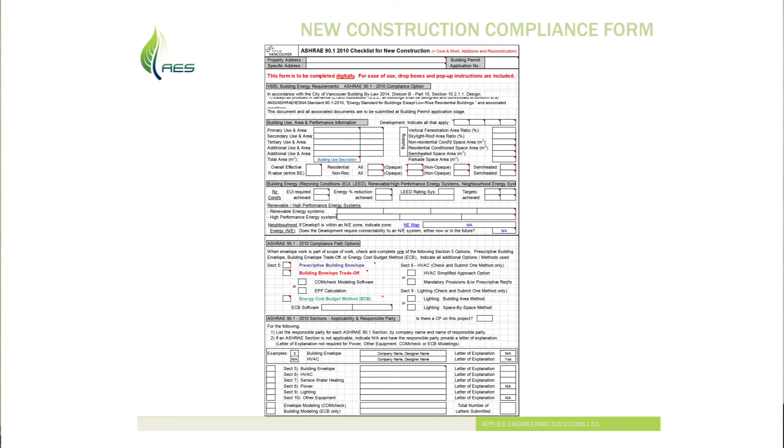If you're going for rezoning, submit your 6 points under LEED Gold or better than the baseline under LEED and ASHRAE, and you're meeting a minimum LEED Gold performance. That's also now changed in the City of Vancouver. Instead of the 6-point baseline, they're now doing 22% better than baseline. It's exactly the same, but they're quantifying it in percentages rather than just saying number of points in the LEED system. Then the ASHRAE 90.1 compliance path, prescriptive, or you're doing an energy model.

What are you submitting in here? Which professional is it? And the letter of explanation, etc. So this is the cover sheet. I fill it. Goes to mechanical, goes to structural, goes to envelope, goes to the architect. Architect is usually the prime consultant, and they take it from there and go forward.

That's one of anywhere between 25 and 50 pages for documentation on that 100,000 square foot facility. On a TI, it can be simpler, could be possibly 5 to 10 pages, but on anything brand new or anything of a decent size scale, it's a lot of documentation, which brings me to my next point, which we'll talk about shortly. Building permit stage, right here.

So in addition to the form that we submitted earlier, there's one for a building permit stage. We fill in all of the requirements. Under lighting, energy statement on drawings. If this is not checked off, plan checker won't take your drawings in. Next line item, lighting compliance documentation. You can click it, download an Excel spreadsheet, fill in all the information.

It's identical to the requirements for ASHRAE if you're doing a LEED project. It's also very similar to the requirements for BC Hydro if you're going for a Power Smart rebate program. So once you fill in one form, you can transfer all the information back and forth. And then down here, this is what's new. If you could see the occupancy stage. So occupancy stage, and right there.

First box, building permit stage submission is complete and accurate, no revisions required. Anybody filled one of those yet? Exactly. We have 3 under our belt. That is the way we want to be going, because if you don't submit that one, the next line item that we're looking at, submitting revised deliverables.

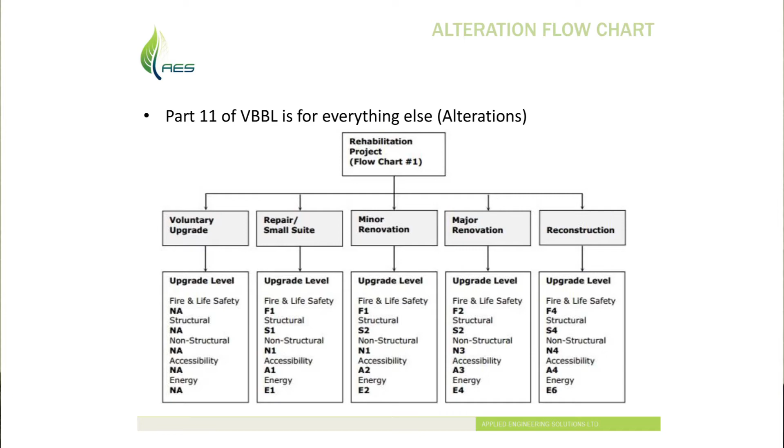Reconstruction, gut to the stud. You're going to gut all the way to the core of the building, and you're going to reconstruct everything. Brand new glazing, brand new electrical, mechanical, etc. That's reconstruction. The energy requirement under that one is E6, which is basically all of ASHRAE. E7 is the next level up, but another way to look at it, rather than bore everybody with the codes, is all of ASHRAE. Under minor TI, it's E2.

E2 gives you a shopping list of 16 items you can pick to do. So under alterations, you have to do alteration requirements under ASHRAE, and we'll talk about that in 3 slides from now. You have to provide compliance with lighting power density. You have to provide automatic lighting controls. But in addition to that, you pick 2 items out of the 16 in the shopping list.

Examples of them: make sure your exit signs are LED. Make sure your HVAC is balanced. Make sure your hot water piping has insulation. Very, very simple. We're going to do that on every project anyway. So in my opinion, what the city has done here has made it very simple and cost-effective for some of the TIs. They may not incur the cost that a 200,000 square foot TI would. So it's very easy to understand. The forms are very prescriptive.

Here's an example of the form. You can't see it, unfortunately, but right up here, you can prescribe the type of alteration you have, and it'll tell you automatically, you're E2 or E4. It'll tell you how many shopping menu items you have. Based on that, you pick the shopping menu items that you want, and you indicate them right in here, indicate the drawings that they're on, fill in all the boxes, make sure you have a reflected ceiling plan.

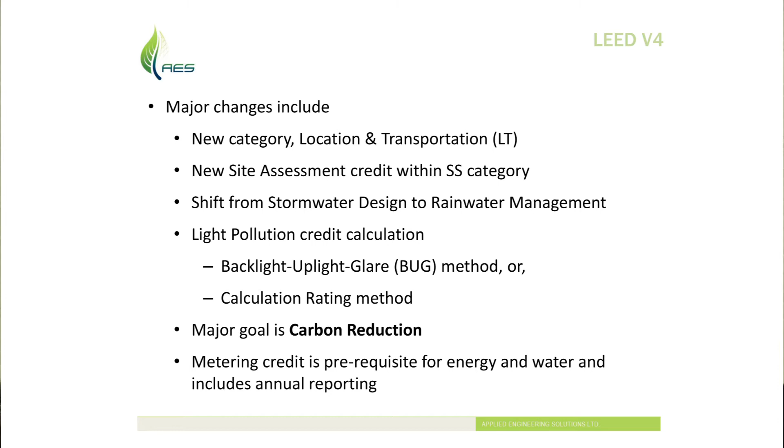The other major change, and I won't talk about LEED too much because we're here to talk about ASHRAE, there is a whole bunch of different sectors or rating systems you can work with. Before, it used to be new construction, commercial interiors, renovations or existing buildings, or MURB for multi-unit residential building. Now, with the exception of a pool, an aquatic, or a community center, I have a rating system for everything. So if I'm doing a tilt-up in Langley, I've got a rating system. I'm doing a district system, I've got a rating system.

I'm doing a research facility, I'm doing a data center. Talk about energy hogs, worse than pools, data centers. So data center, I've got a rating system for that. So it actually helps you achieve some of the goals around LEED. And we'll see when the rating systems come out and how we can apply and comply with it. I'm not going to talk about the rating system in detail other than the focus of LEED has changed. Previously, it used to be energy reduction. The new approach is carbon reduction.

So if you don't understand the difference between the two, when I save energy, I save some carbon because I'm saving electricity or gas. And they both have carbon signatures in British Columbia. Electricity are much lower, which is why the fuel switching has been happening for the last 4 years since carbon tax was introduced. Carbon reduction, when I save carbon, I automatically save energy because carbon reduction is approaching everything differently.

That's why all the automobile manufacturers are coming out with electric cars and A series and C series and 1 series and all these smaller versions of cars because they all have to reduce their carbon emissions by 50% by 2016. So all the manufacturers have it way worse than what we have. And all we're talking about is turning off some lights. And the amount of grief we get from the community for doing that is incredible because nobody wants to turn anything off. It's got to work.

Metering, the last one, it's a prerequisite in the new rating system. In the city of Vancouver, metering is also now a building code requirement. You have to have separate meters for all your different systems. They've left it open to interpretation. So you can have 1 meter and apply and they'll reject it. So you really have to break it down and use your own logic.

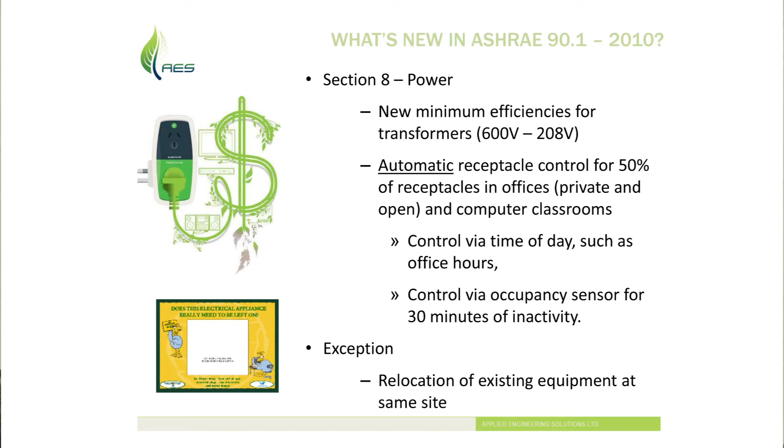But if you've left your desk and you're not there for the majority of the day, or even more than 30 minutes, nothing needs to run. And that's the intent of this code. You can do it by time of day. So time of day is also acceptable, and I used to say we do that for anybody that's got banker's hours. Since the recession in 2008, I think we all work consultant hours, so every waking minute we're working, 24 hours a day, so time of day doesn't really work. We provide local sensors and turn lights or turn receptacles off as required.

Lighting and alteration. So previously under ASHRAE 90.1-2007, the threshold was 50%, which meant almost no project. It was previously 50%. Now it's 10%. So the example I'll use, if you take a 100,000 square foot building, take a typical floor, 10,000 square feet that you work with. On 10,000 square feet, if you have 10,000 watts of lighting and you're altering more than 1,000 of it, you have to comply with this.

So if I'm doing a TI and I've got a floor and I've got a boardroom, and the boardroom is 1,000 square feet of the 10,000, and the boardroom is 10% of the lighting that's connected, and I'm taking that boardroom, chopping it up, and making it 3 or 4 private offices, I have to implement LPD, which is make sure you don't exceed the lighting power density within that space, and I have to implement automatic lighting control for the space I'm renovating, not the entire floor. So the 10% area I'm modifying is where I have to comply with it.

And the definition of space is your floor, the area, the walls. You can define it any which way you want, but grossly stating an entire building is my space and I'm doing one little cubicle in the corner, so that's under 10% and I comply, that doesn't work. There has to be logic behind it. So your space is typically the area that you're in, and we typically limit it to 1 floor, so 10%. If I'm below that, I don't have to implement it. If I exceed that or am at the threshold, I have to implement 2 things.

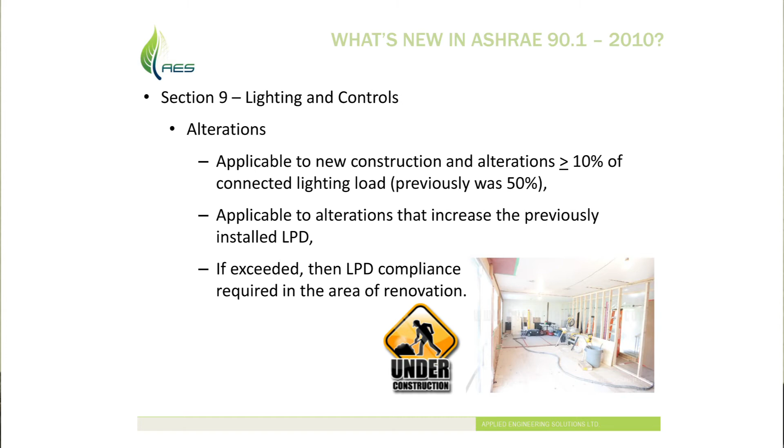One is LPD, which is lighting power density. So if the code says for a boardroom I'm only allowed 500 watts and I've got 1,000 in there, I've got to reduce it to 500. So the finishes and the reflectivity of furniture and all the finishes in the room are very important to us, because the lighter they are, the less light I can put in, and the brighter the space feels. There are exceptions, and in the interest of time, we're just going to kind of rush through this.

Lighting controls. Any enclosed space requires some sort of control. So automatic shutoff is required just about everywhere. If I'm in this boardroom and I leave this boardroom and everybody else exits, 30 minutes after everybody leaves, lights must turn off. That is code. 30 minutes is the maximum the code allows. You can design it for whatever you want. In our office, for the receptacle switching, and we designed our office in 2012 when receptacle switching devices were not even available.

So in 2013, when we finally moved in, we bought power bars, hardwired everything in, and we've got sensors under everybody's desk. So 5 minutes of no motion, everything except the PC turns off. You come back to your desk, boop, boop, everything's running. The cost for it, $50 a workstation.

And it might seem like a lot, but on the energy bill I save about $200 to $300 a month on the other side, because other than heaters and fridges, because no one's allowed, that's just a rule in our office, everything else is off. Task lights are off and everything else is off. So you do save on the bottom line.

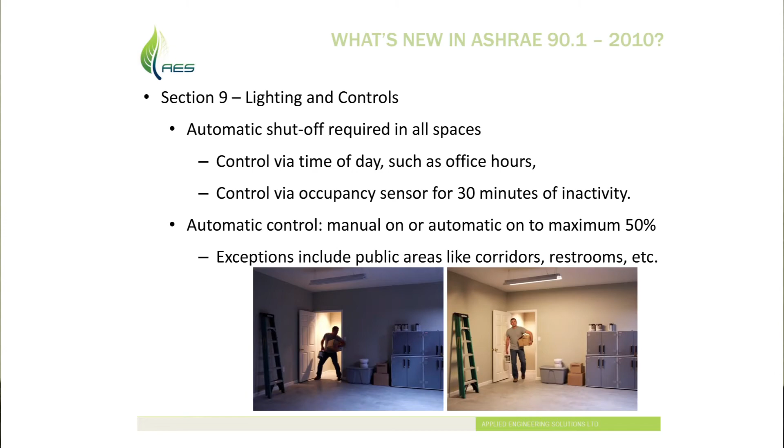Control via time of day: you can do a central bank and a time clock and turn everything on and off. That is a compliance method. We don't design to that. We actually design for local activity. So anything that's enclosed, I've got a local sensor. If it's an enclosed room, I'll do a local sensor. If it's common area corridor, I'll put in a low voltage system.

But typically we go with line voltage, localized control: cheaper, easy to repair, ton of product on the market. We do a 120 volt system. We don't do 347 anymore because 347 control is very expensive and very difficult to procure. There are exceptions like corridors and so on. They talk about stairwells as an exception, but it's not, and I'll explain why in a few slides.

Automatic on. So anybody work in an office tower downtown where you walk into work at whatever time and the entire floor is lit? There are a few people, not very many. Good, your landlord's already gone in and implemented something. But what used to happen, in the older designs, is you had a bank of switches as you got off the elevator. You came in at 6 o'clock, all the lights swept on, and at 8 o'clock they started sweeping off. You get the flicker control to give you a warning. You went back and hit the switch to override and the lights came on.

We can't do that anymore in design. It's not allowed. BMS control to turn everything on is no longer acceptable by code. Not the engineer being a tree hugger. It's a code requirement. Manual is what we have to do. So automatic control, if you are going to tie it into some sort of automation to turn the lights on,

50%. The logic behind that is if I come into an office on a Saturday afternoon because I've got to do something, I don't need the whole floor on. I need enough lights to get me to where I need to go. 30 minutes later, all turns off, and where I am is the only thing that stays on. So if you are going to design with automatic control, you cannot turn everything automatically on. You have a 50% maximum requirement. Anything beyond 50% is manual on, so a switch at reception that turns the lights on.

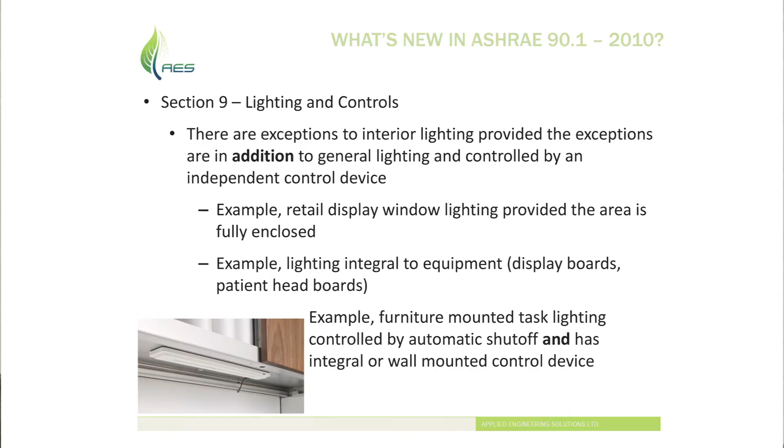The last one is task lights. So the design in BC, and everybody probably remembers this term, 50 foot-candles. And 50 foot-candles was the number. It used to be 100, and it went down to 50, and WorkSafe BC worked with that number. Every office space had to have 50 foot-candles of lighting level. So we put in all these deep cell parabolic with 2 or 3 lamp requirements with T8s or T12s, and we hit 50 foot-candles. And then ASHRAE came in and the LEED movement came in, and we wanted to save energy.

So we went from 50 down to 30 so I can reduce the illumination level so I save energy, so I can get more points on the LEED system. And I gave everybody a task light. And the task light provided lighting where I need it, and the general illumination was bright enough so I can work in my space. Now, if a task light is free-standing, if it's just sitting on a desk, I have to include the wattage for that in the lighting that's built into the ceiling. So I might as well have done 50 foot-candles and call it a day, but then I don't save energy.

So task lights now, to exclude them, they must be hardwired. So clamp down to a desk, yes, that's a solution for anybody that cannot procure pre-wired workstations with built-in task lights. But task lights that are built into a workstation, manual on switch, and automatic off sensor. If you have that, I can exclude the task lights.

So for the designers and the furniture suppliers in the room, the FF&E discussion happens way after we start construction. I've issued IFT, I've issued IFC, everybody's already started ordering and building raw construction, and then we go and procure furniture. Furniture, I need to know at the beginning of the project what you're going to do with furniture. Is it pre-wired? Is it not? Simple decisions, not Haworth or what manufacturer. Pre-wired or not, you're going to get task lights in or not, what's your reflectivity on the furniture? So those decisions need to be done up front.

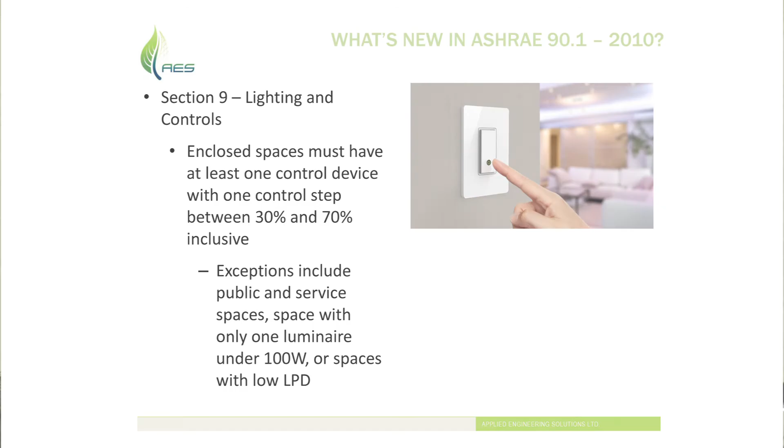Where the 30 and 70 comes from, remember, ASHRAE is an American standard, not a Canadian standard. So a lot of the American designs are still working with 3-lamp solutions. So if I turn one of the 3 lamps off, I'm at 70% of maximum. That's where it comes from. So when you understand the intent, it's easy to figure out why. What we do in design is we just put a dimmer in the room and we comply with it.

You have exclusions. If there's only one fixture in the room, less than 100 watts, I can exclude it. But typically, it's not the case. You have much more than that. Occupancy sensors are required just about everywhere. So if I leave the room, I need an occupancy sensor. In our designs, we use vacancy sensors. We don't work very much with occupancy sensors unless I'm in a bathroom.

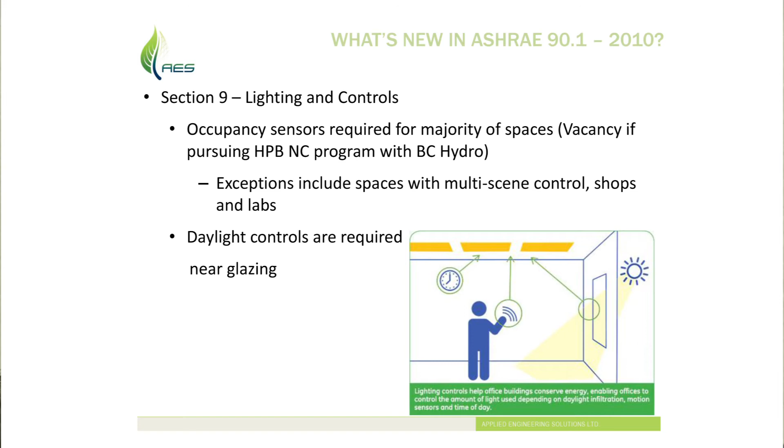Main reason being, almost every project I pursue a PowerSmart hydro rebate or a credit back from BC Hydro. And Hydro will work with anything that you do above and beyond baseline. So if baseline says you must put an occupancy sensor in, you're not going to get a credit for that. Vacancy sensor is a credit. So the difference between the two, an occupancy sensor is automatic on, automatic off. Vacancy sensor is manual on, automatic off.

I've got a corner office facing Granville. It's always lit between 8 a.m. and 5 p.m. My lights are only on when I get in at 5:30 in the morning, and by 8 o'clock I turn them off, or the daylight sensor kicks in and turns them off. So any other time of the day, if I come in and I need light, I hit a button and manually turn the lights on. So the idea is if your space is well lit, you don't need to turn the lights on. So that's why we use vacancy sensors.

There are exceptions, but basically, if you've got glazing around the perimeter and you've got a workstation around there, you've got to dim the lights, and it's got to be automated. You can't do it manually. Parking garage, the most controversial one out of everything that we've got to do. All parking garages, we've got to turn the lights off. It is a requirement. Read section 9.4.1.3, subsection 1, which says comply with the front end, and the front end says everything must turn off after 30 minutes of no occupancy.

So in our design, what we do is at 20 minutes, we provide a flicker, and the lights give you a flicker. So if you're in there, it stays on, and there's occupancy sensors everywhere. If you're moving in the parkade, it's on. But at 3 in the morning, all the office towers downtown, there's no reason for any of the lights to be running because nobody's in the parkade. By code now, we've got to turn them off.

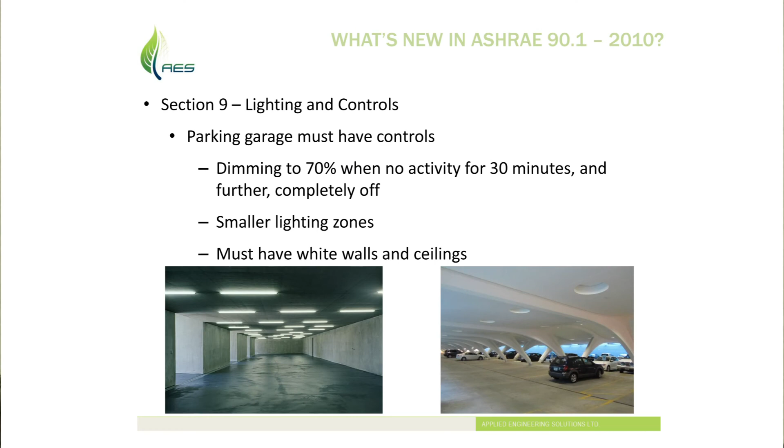And that picture on the right, by the way, is a project in the US Midwest, done for $35,000 a stall. $35,000 per stall. And the budgets we use in the city of Vancouver are $40,000. So it is very doable. It's not something that's far-fetched.

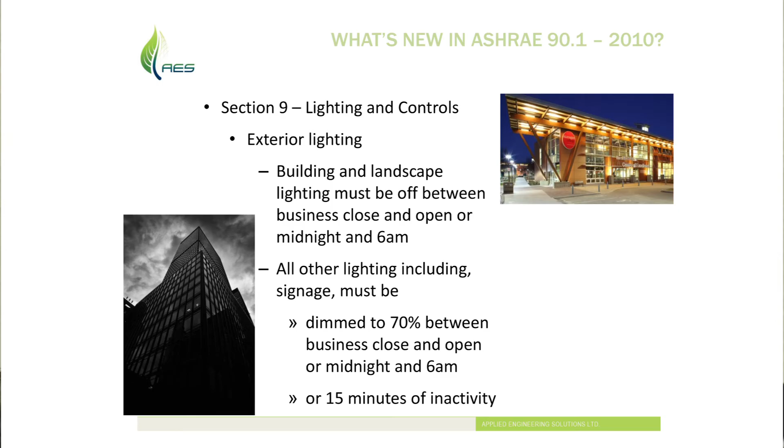The next item is signage. So in signage, we've got to reduce to 70% illumination. So if you've got a building sign on the top of a building or at the front or anywhere around your building, you can have it lit after hours, but it must be dimmed down so that you're not bugging your neighbors and you're not affecting animal wildlife as well. So this is code. This is not us being energy efficient and trying to push the envelope. This is the baseline. We've got to go above and beyond this.

Lighting controls, for anybody that does hotels and guest rooms, you walk into a guest room. So if you go down on holidays, to Mexico or the Caribbean or anywhere in the warmer than here climate most of the year, you leave your room, you pull out your guest card, everything turns off. That's where we're going to end up in 6 years. Right now, I've got a master kill switch. So I walk into a room or an apartment or a hotel room, I've got a master switch that provides the power to all the rest of the lighting in the space, and then I can further turn things on and off.

When I leave the room, I hit the master switch off, kill all the lights in the space. That is code. And all hotel chains are now implementing it because they've saved a ton of money. And the ROI that I've been given on this requirement is about 6 months by every hotel operator in BC, based on our low energy rates. So it is worth doing. Task lights we've talked about.

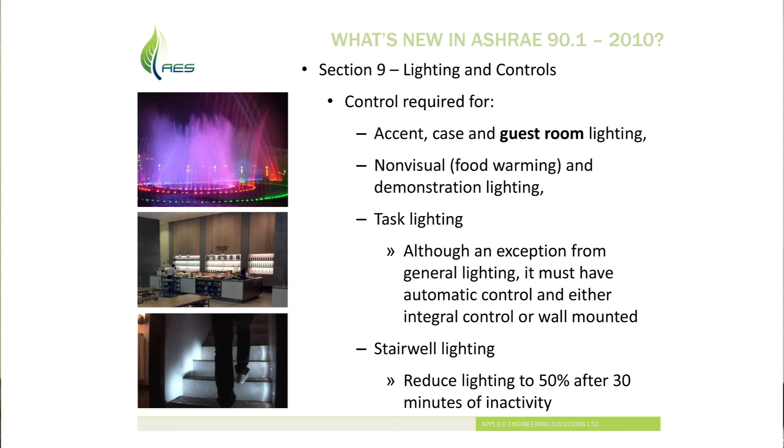Stairwells. So stairwells, we have to reduce the level of illumination in stairwells down to 50%. So all the stairwells in all the office towers in a downtown setting or a suburban setting that nobody ever uses because we're so dependent on the elevator or the internal staircase if you've got a fancier office. You may not use it, which means it's always lit all year round. The only time you go in is when the landlord makes you do a fire drill. Other than that, nobody touches it.

Now we've got to turn the lights down to 50%. In our designs, we go down to 10%. If you walk into a landing, the light comes on, the one above and below the lights come on. So if on this landing the light fails, the ones above and below are lit, get you illuminated so you can exit the building. But dimming for stairwells is code. It's not something we are trying to do to save energy.

Mandatory commissioning, I talked about it at the front end. So if you read the line, it includes functional testing and must be an independent agent. So on a LEED project, we have an independent commissioning agent that does all the commissioning. We include in their specification to do the lighting as well. If you're not pursuing a LEED project, you still have to do this. And it's not me, and it's not Tony doing the lighting supply, and it's not Craig doing the lighting installation. It's somebody that's independent to the project. So you have to get an independent person come on board.

And we're not talking about somebody that's certified in a level of detail that's beyond what we already do. It's lighting installed, yes. Controls, yes. Works, yes. Give me a letter, make sure it's done. That's all we want to do, make sure it's commissioned.

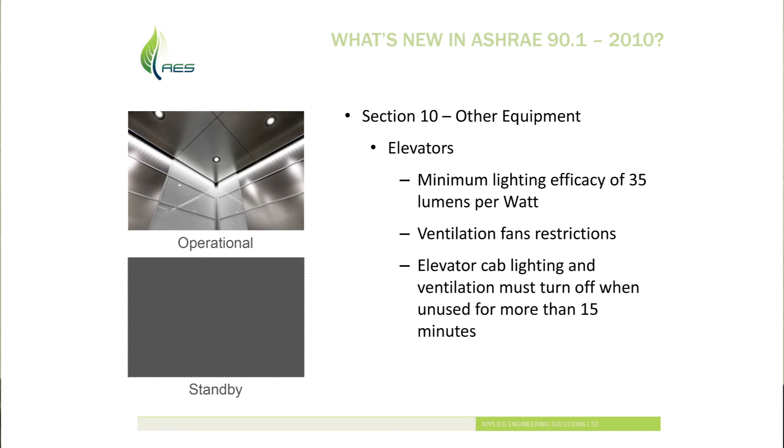The other one for anybody that specifies elevators, and the reason I throw it up is nobody looks at Part 10 of ASHRAE 90.1-2010. Part 10 is for other equipment. Under other equipment is elevators. So now, if you specify an elevator, it must have a shutoff for all the lighting in the elevator and the fans in the elevator if the elevator is in standby for 15 minutes or more.

So why I mention that, you can still buy old product, and if you specify that on a project, and Sally's laughing because we can't specify it on a few projects, the inspector at the end of the job, when he comes in for a final permit, you may be pulling that elevator out. There's one project in Vancouver where that is occurring. I won't name it. Very unfortunate for the owners, but it's code. You have to do it. So don't buy an old product. Make sure you're up to par with what's important.

So, who cares? Why does all of this matter, and why is it a big deal? I'll give you one very, very simple example. We did a project where I worked with the architect. No ceilings, concrete, very light coating on top.

All the finishes were approximately 70% reflective, lighter whites, lighter browns, no grays. Carpet, very, very light gray. We worked with all of that, and the requirement from day one: suspended fixtures, no hot spotting. I don't want to see the strip of light when I'm driving by on the highway, the bang, bang, bang, bang, and I can see the illumination. I want an even graze across the ceiling.

So we picked the right reflectors, we picked the right fixture, and we worked very closely. We did 3 mock-ups, we got it all done. And then at the end of the project, we weren't informed, but somewhere through the process, the designer accepted a change in the carpet from light gray to dark maroon and shaggy style. So the reflectivity of a light gray was 50-55%. The one they accepted was 0.

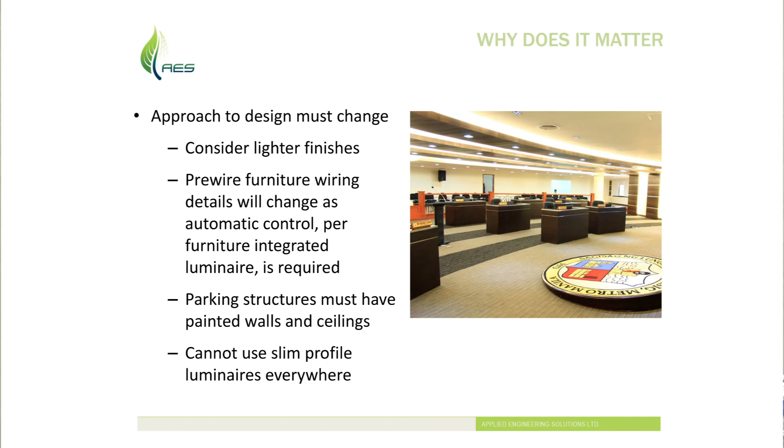Moral of the story, if you make a change to a finish, let me know. It makes a huge difference on the lighting for the project, and it can destroy your entire vision of what you're doing for the building. That's what this is about.

Budgets. We start a project, the budgets are beautiful. At the end of the project, they all change because requirements and what's important changes. So controls are not expensive. And anybody that supplies and installs controls, they'll tell you they're not expensive. It's about $1 to $2 a foot on the overall budget of whatever your budget is. Could be $60 a foot, could be all the way up to $100 a foot. On a brand new build, purpose-built building, maybe $300-400 a square foot. So $1 to $2 is not much. But that's where we start.

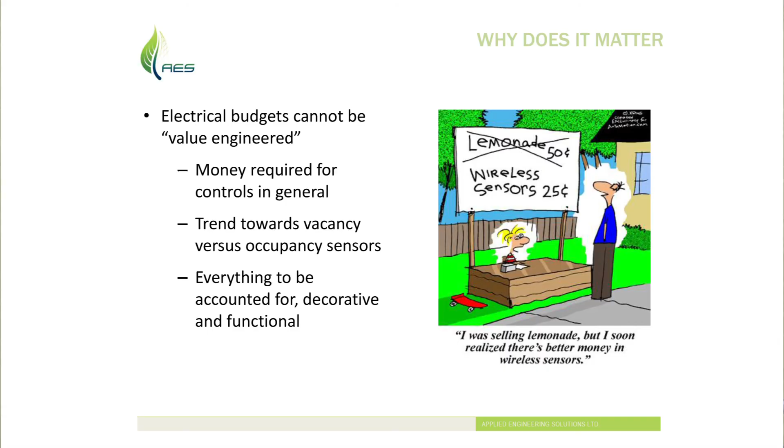And the first value engineering option provided by everybody on a project is controls, take it all out. You can't do that anymore because the 25-cent solution that gets me a switch on the wall is no longer compliant with code. So if you stick with the budgets you start with and look at other ways to pull money out, no problem, you can comply with it.

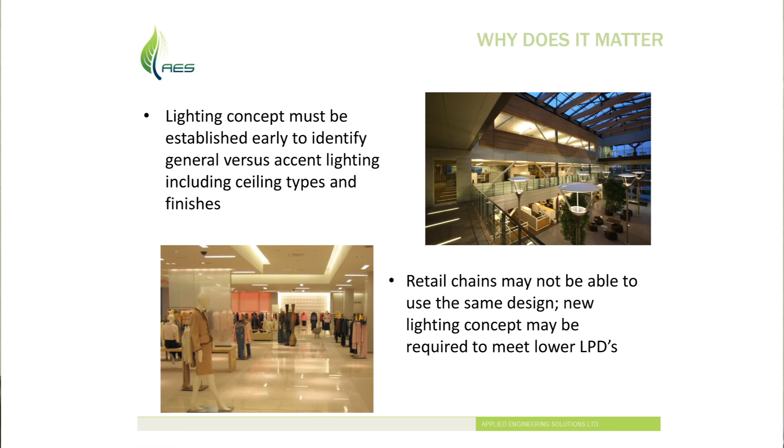This one is a department store that I'm sure everybody here has shopped at, and it's one of many department stores. They all kind of look the same. If you look at that, I've got cove lighting right down the middle, cove lighting down here. I've got 2-foot fluorescents. I've got grazing along the wall back here. This is approximately 32 to 35 watts a square meter, which is not a problem for retail. What's the code now? 15.

So when we're designing Lululemon on 4th Avenue and when we're designing Blends Coffee on 2nd Avenue, we had to have a C-level discussion with all the owners. You're going to rebrand. And why do I have to rebrand? I've been doing this successfully. Well, if you want a store in British Columbia, you're rebranding because you're not going to get a building permit. So Nordstrom had to change their lighting and how they were going to achieve some of their stuff.

We're working with Microsoft now on the top 2 levels of the Nordstrom building that they're moving into. It's a wholesale overhaul to Microsoft standards that they've deployed in North America for the last decade. It's not a bad thing. It just means you can't do what you've done for the last 20 years because it's worked.

It's not going to work anymore. You've got to look at more innovative ways of achieving the intent. So, how do I comply? There's two codes. ASHRAE 90.1-2010, everybody's familiar with the ASHRAE. NECB 2011 is the other one.

So NECB, if anybody's familiar with the older version, the MNECB. So MNECB was the Model National Energy Code for Buildings. They've dropped the M and made it a National Energy Code. The difference between the two: ASHRAE is American, NECB is Canadian. ASHRAE is cooling climate-based, NECB is heating climate-based.

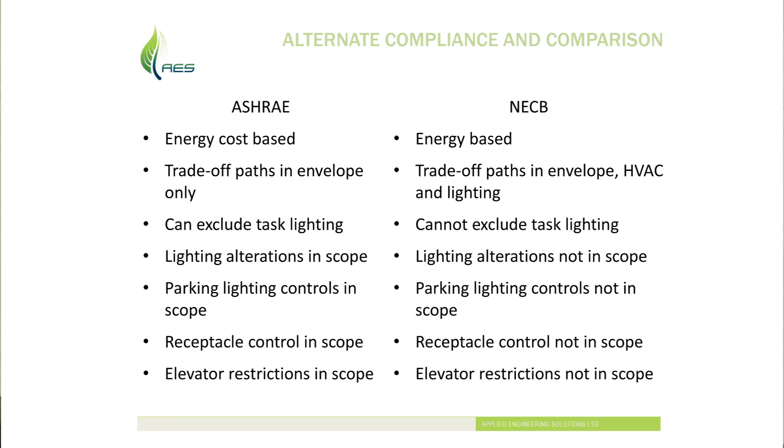So if I'm doing a project up north, Fort St. John, Fort Nelson, somewhere with a fort, somewhere where it's really cold, -30 is your daily temperature in the winter, NECB is the better approach. Whereas if I'm doing a project in Lower Mainland, where even though it's 7 degrees outside and it's freezing cold, we're air conditioning this room, ASHRAE is the better approach. So it really depends on your project. You have to look at the way that you're going to achieve the intent the best.

If you're doing a LEED project, you may be doing ASHRAE, so doing an NECB approach may not work, because then you'll do NECB documentation and ASHRAE documentation, double the cost. If you are going to go with NECB in the City of Vancouver, they have very prescriptive requirements around what you must do, so you can't pick and choose like we pick and choose with ASHRAE.

I've got three slides left, and then we'll wrap up. NECB does save you much more energy, because in NECB you have a better envelope, better glazing, much better performance system around the heating and cooling of a building, whereas in ASHRAE you don't have those stringent requirements. Comparison of the two,

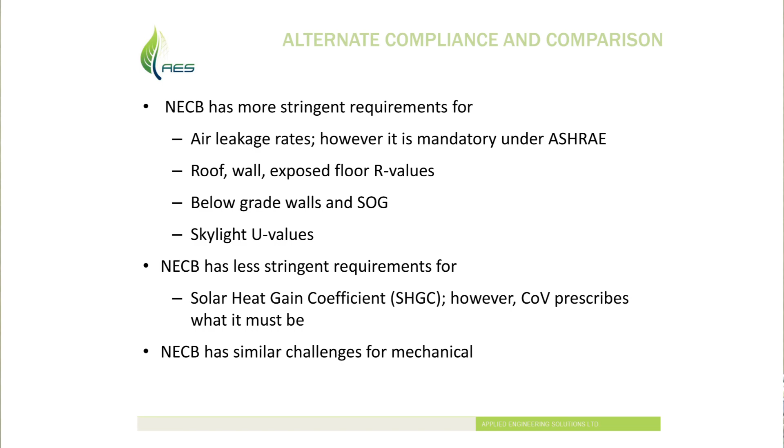very simple. Lighting alterations is not a requirement under NECB, and the reason for mentioning that up here is ASHRAE is applicable to a Part 3. People understand Part 3 and Part 9 buildings. So Part 3 is anything bigger than 600 square meters. Part 9 is anything smaller. Part 3 building, Part 9 building, and alteration, I can use ASHRAE.

NECB is only applicable to a brand new Part 3 building. Part 9 building, no NECB, it's not applicable. Alteration, tenant improvement, renovations, expansions, so on, you cannot use NECB. So it's not even an applicable code for many projects. So it's an alternate, but it's a very restricted alternate, right? So you can't just go ahead and jump into that one.

If you are going to pursue NECB, I've talked about it already, there are much more stringent requirements around the envelope and the glazing itself, so you may not be able to comply with it. The designs in Vancouver are all glass and all wood, because we want to have transparency, open to nature, open to the views and the daylight. So you can't really do this if you're going down the NECB compliance path.

The difference between the two: we modeled a project in Lower Mainland, I won't name the project, 70,000 square feet. The NECB upcharge for glazing and window wall and insulation versus the upcharge for controls. NECB was $1 million, controls was $55,000. So in our climate, it does not always work. So last slide and we're done and we can get into questions.

What do you do when a project starts? Really define the project goals and what's important to the project. What are the owner's requirements? What do you want to do? Some owners want to do a Living Building project. Okay, great, that's a target. Define whatever it is you want as a target, work with that.